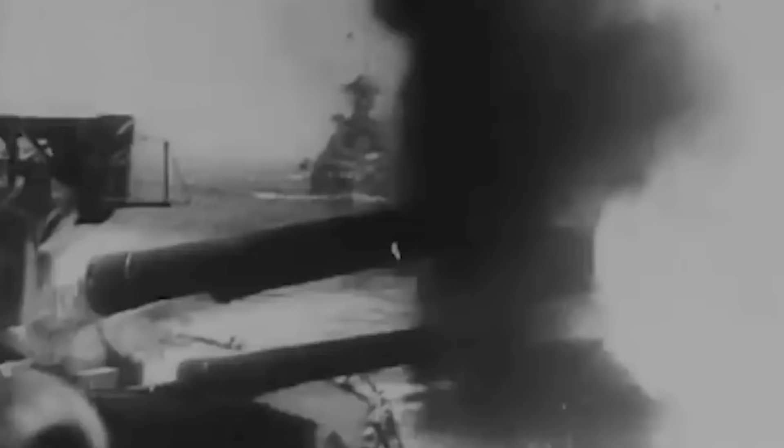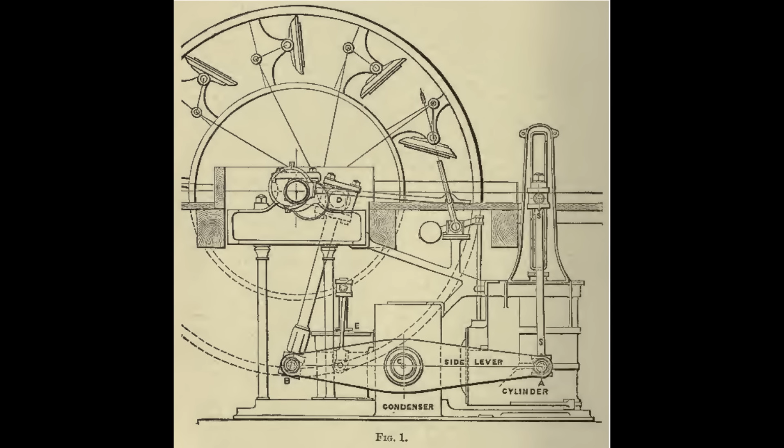The history of engines in warships only spans a couple of centuries, a far shorter time than ships have been in existence, but enough time for radical change in the field of naval propulsion. We've already covered boilers, the things that generate the steam, and later on we'll cover propellers, the main form of actually moving the ship around for most powered warships. But today, we're going to take a brief look at what sits between the boiler and the screw or paddle wheel in order to ensure that the ship can move. Now, notably, we are only going to be looking at the main developments of the marine engine, rather than looking at every single possible subvariant and dead-end design that ever was come up with.

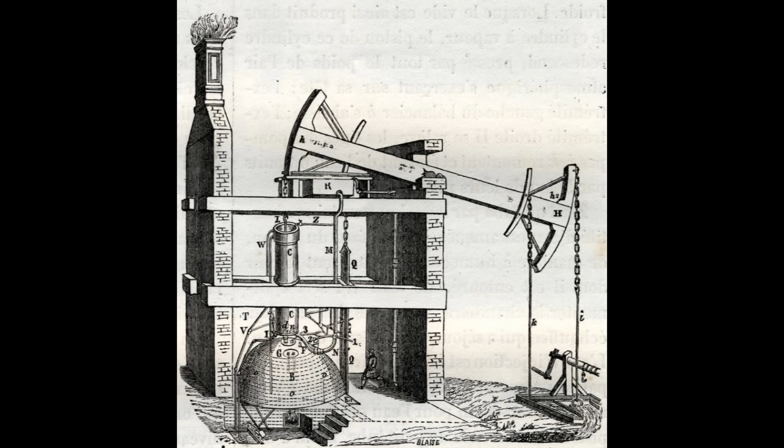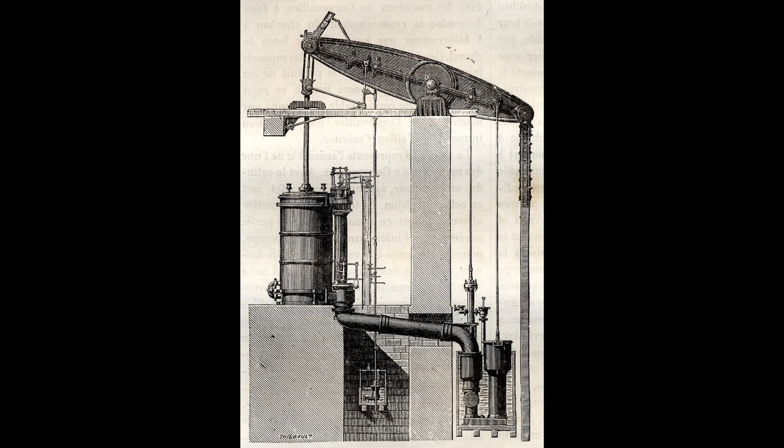Steam engines had been around for about a century, just over, by the 1820s. Although most of that time they'd only really existed as massive low-pressure fixed installations which could pump water out of mines and drive factories, but little else. But the dawn of the 19th century had seen several advances in raising the pressure that could be used in steam engines, and this in turn gave a much larger power output for a given size of engine, and this began to make the idea of an engine that was small and powerful enough to be used on a mobile platform instead of a fixed installation somewhat more viable. Due in part to the fact that ships are simply much, much larger, ships would be the first application of this technology, with various experimental steamships beginning to be devised in the late 1700s.

But the first use of steam power in a military application was probably the paddle-powered floating battery Demologos, later Fulton, which was developed for but not completed during the War of 1812 on behalf of the US Navy. However, her nature meant that she was effectively confined to harbour.

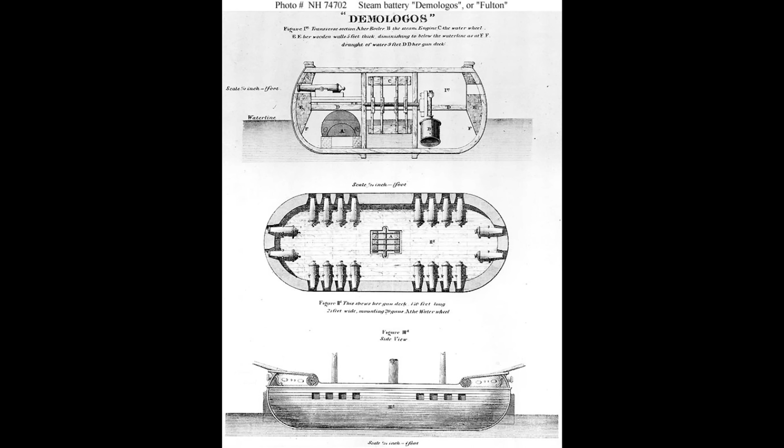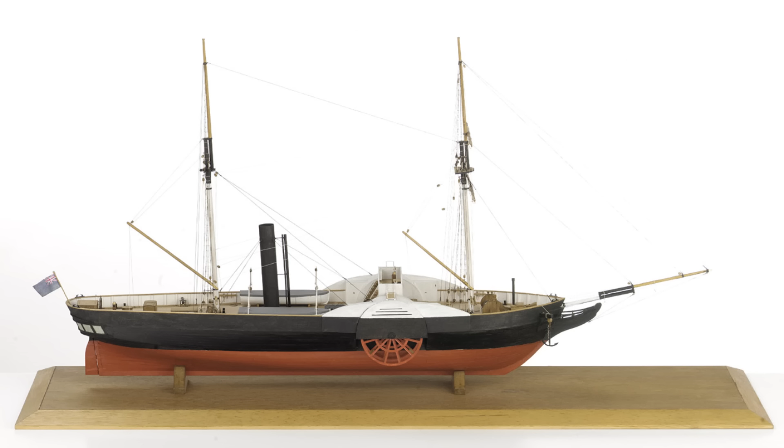The use of steam power fully at sea would have to wait until the deployment of ships like HMS Comet, a paddle-powered tug launched in 1822, along with other small ships like the Monkey, which displaced about 210 tons, and which used Boulton and Watt steam engines that had around about 80 nominal horsepower. Some of these engines had 2 cylinders, and could work at maybe 1 revolution every couple of seconds. The Monkey was followed in service by the Active, which also had 80 nominal horsepower, and then the Lightning in 1823, which had 100 nominal horsepower.

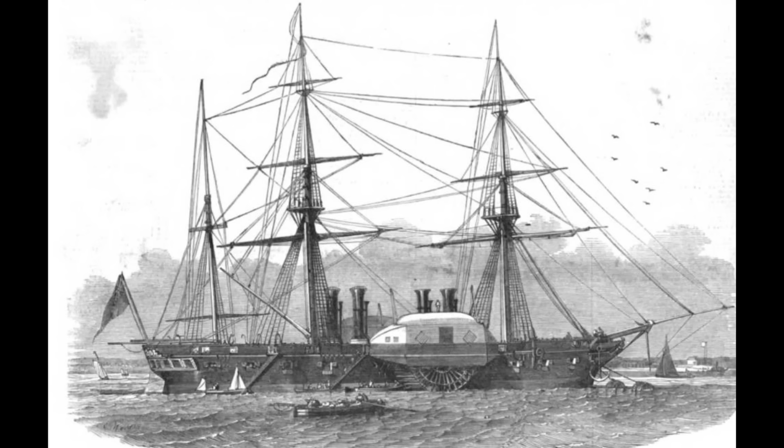These early steam vessels were mainly used for towing and general harbour and coastal purposes. They couldn't really be called warships. All of these vessels were propelled by paddle wheels. The limitations in terms of perceived vulnerability and the amount of space along the side that the paddles took up would mean that a full-on warship intended for the line of battle running on steam would have to wait for a little bit. But these early ships used some of the earliest form of steam engine equipped on a warship, the side lever engine.

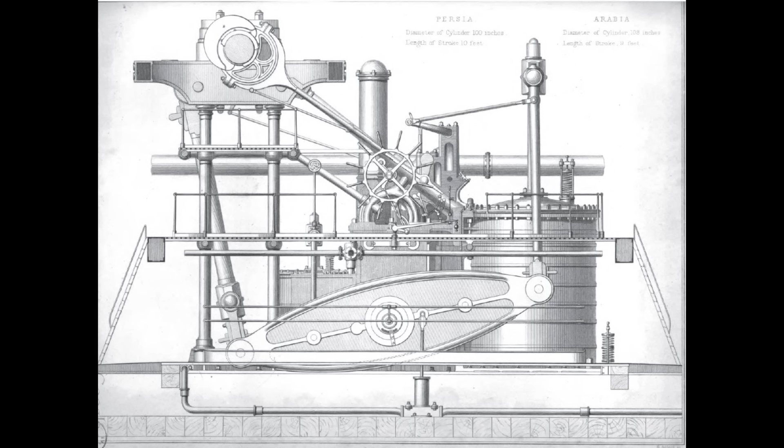This was a step up from the simple beam engine that was the ancestor of all other types. The side lever engine was a fairly tall mechanism. As with all steam engines, pressure built in the cylinder, which then forced the cylinder head to rise, and once the cylinder head got to the top of the cylinder, the steam pressure was released, and in the case of the side lever engine, the resulting weight and vacuum drew the cylinder head back down again, where it would repeat the cycle. In the side lever engine, the head was connected to a rod that lifted one end of a large iron lever, or sometimes 2 for balance purposes.

This would then cause the other end of the lever to rise or fall in opposition, and that, in turn, was connected via more metalwork to a crankshaft that generated the rotational motion. Compared to a beam engine, where the lever was mounted quite high up, on a side lever engine, the heavy levers were mounted much, much lower down, which gave the entire engine a quite low centre of gravity and made the entire thing a little bit shorter in the vertical element.

This was important on a warship for both stability and tactical considerations. Even if it was mounted quite low in a ship, a tall engine could end up with a substantial portion of itself above the waterline, and that in turn rendered it very vulnerable to being disabled by gunnery, usually accompanied by some kind of disastrous steam explosion to go along with it.

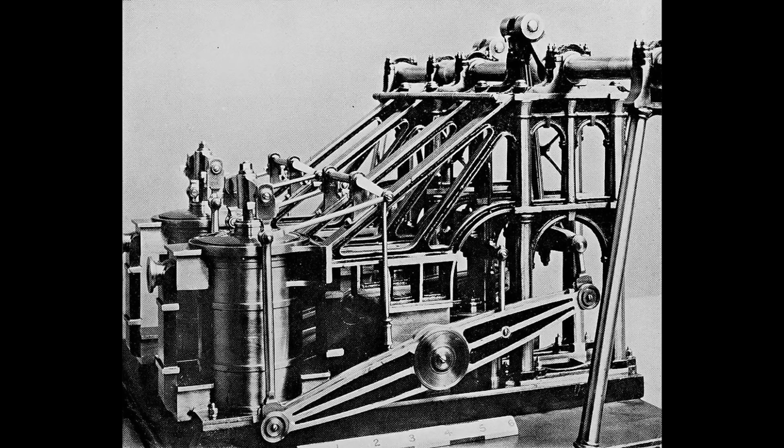The side lever engine was still somewhat tall due to the size of the cylinder needed to get a useful working pressure, and ships up to and including the American Civil War period would still sometimes end up losing power to hull shots crippling the upper parts of their engines. But the risk was somewhat smaller with a side lever engine than with some other earlier engine types.

The two main issues with the side lever engine were firstly that it could only realistically power paddle wheels. That wasn't so much of an issue in the 1820s, but it was something that would rule against its continued use as time went on. The other issue was that the normal twin levers and all the various connecting rods made it overall a very heavy engine for its power output.

Whilst it was running at a somewhat higher pressure than older engines, that simply meant that PSI values could be read as whole numbers above atmospheric pressure, and they actually did some useful work beyond creating a vacuum, which in older steam engines, especially mine pumps, had actually ended up being the thing that did most of the heavy lifting.

Between the early 1820s and 1840, 70 additional steam vessels would be added to the Royal Navy alone, let alone all the other navies that were quite rapidly adding steam warships and auxiliary vessels to their forces. The majority were fitted with the side lever engine, and this tended to work at a steam pressure of about 4 pounds per square inch above regular atmospheric pressure.

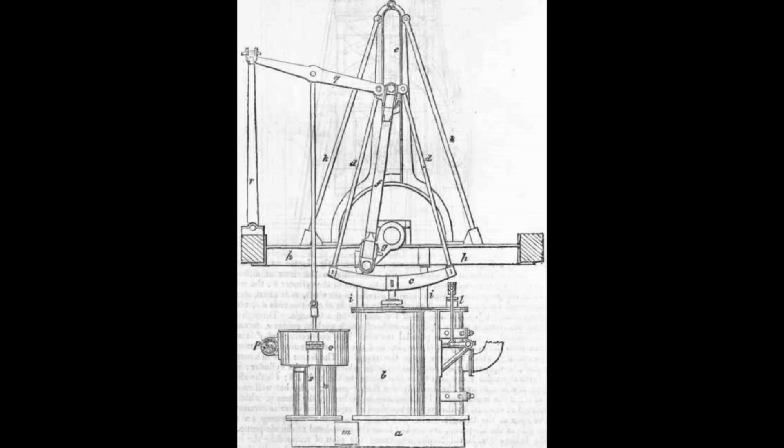After the introduction of the side lever engine, a number of variants on both older beam and the side lever engine itself were developed, often with quite significant regional uptake local to the developer who'd invented it, and occasionally they would see significant uptake across the world after a short period. But most of these variants were largely civilian developments and would not feature in warship construction except in extreme circumstances, such as the American Civil War, where merchant vessels were taken into military service and converted into warships, despite the fact that their engine design may not be necessarily optimal for a gun engagement.

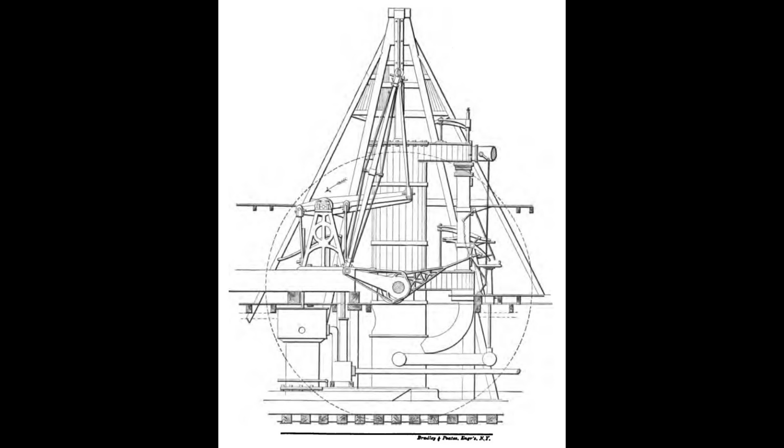The main reason for the lack of use in ships actually designed for combat was that, similar to the beam engine, most of these variants had significant weight and carried a lot of that weight at height. On a merchant ship, that was less of an issue thanks to the large amounts of cargo they carried, which had quite the ballasting effect that would mitigate stability issues, whereas on warships they were already carrying substantial weight much higher up due to having to carry guns and the associated gun crews. When such converted ships ended up in combat, these tall engines could often prove to be something of a weakness. But the increasing prevalence of the screw propeller demanded a new kind of engine.

The conversion of older ships to block ships, these usually being Napoleonic-era ships of the line, typically a third rate, that had been converted to carry a steam engine and then used either as a guard ship for a harbour or as some kind of wind-independent coastal defence force, as well as much more ambitious plans to convert larger vessels to carry auxiliary steam power plants, plus the construction of newly built smaller vessels, saw a wide range of systems tried.

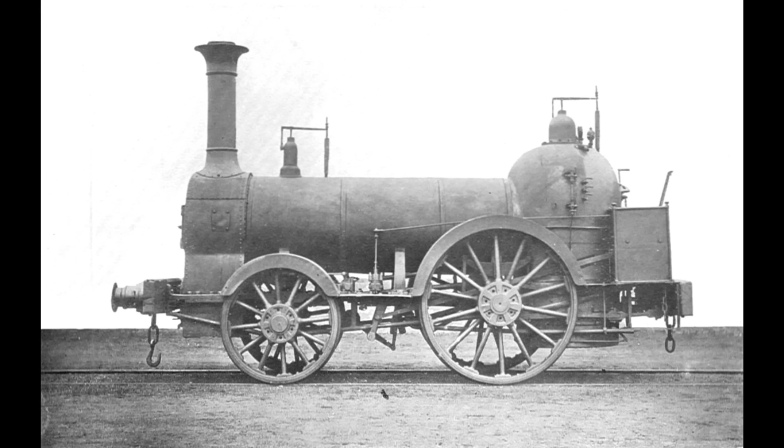Even though the steam locomotive had actually been a slightly later development than the steam-powered warship, in some cases what amounted to steam locomotives that had had their wheels taken off were used for lower power application and auxiliary plants. This wasn't ideal for a number of reasons, but these power plants could at least drive a screw propeller and were somewhat readily available.

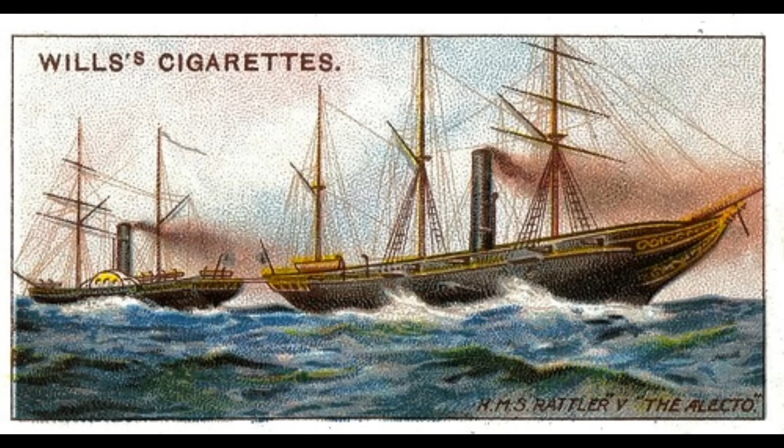Two particular ships stand out in this period of development, which ran from roughly 1830 to 1850: HMS Rattler, the British screw sloop that famously engaged in a tug-of-war with the paddle-powered HMS Alecto, and the French line of battle ship Napoleon, which was the first purpose-built steam-powered capital ship to enter service. The former vessel, Rattler, used an odd engine type that didn't really catch on in warship circles.

The Siamese or twin-cylinder engine worked on the same kind of pivot and lever system principle as earlier side lever engines, but instead of a single larger cylinder, it used two shorter cylinders to provide the relevant motive force. This allowed the engine to be somewhat shorter in the vertical element, and the two cylinders meant that only a single arm was mounted in between the two cylinders, instead of the two arms more commonly found on either side of a single cylinder in a side lever engine.

It was compact and slightly lighter than the older engine, but it nonetheless reflected the growing divergence between civilian and military engines, as its primary attraction was the fact it didn't interfere with the lower parts of the gun deck, as opposed to any particular fuel efficiency.

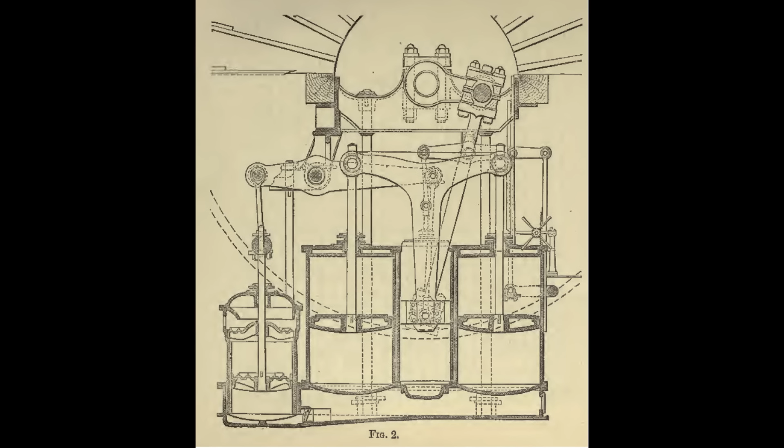But the multiple stages of leverage between engine cylinder and crankshaft in any of these types were somewhat inefficient in terms of transmitting power to the screws, and all of that metal was quite heavy. A change was needed, and so engine technology began to advance to direct drive type engines.

In the paddle-wheeled ships, which were still in use as tugs, sloops, and other vessels not considered likely to see much combat and definitely not going to stand in the line of battle, one of the first direct drive engines was the so-called Oscillating Engine, which was used almost exclusively to drive paddle-powered warships.

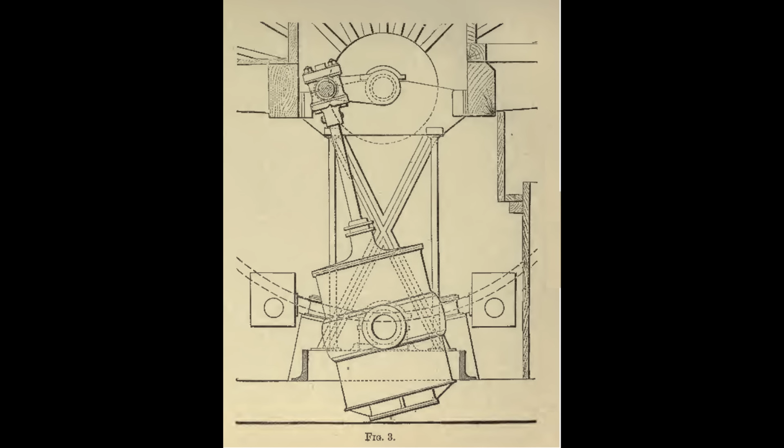Simply put, the direct drive system allowed the cylinders to impart power directly to the crankshaft, making the entire system significantly lighter and more efficient than older types, since the beams and most of the rods could be done away with, and there were fewer stages of energy transfer in the system.

However, they required the cylinders themselves to be able to move to account for the crankshaft rotation, something which had previously been the concern of the intermediate beams.

It also concentrated quite a few separate movement aspects into a number of fewer components, which made the savings described earlier, but also meant those individual fixed components were far more complex and thus far more difficult to maintain.

The requirement for the moving cylinders was a particular sticking point with this kind of engine, as it also meant that the feed for the steam line had to be fairly flexible, and, well, if anything went wrong, you had a cylinder full of hot steam that was moving back and forth, which was not that easy to get anywhere near.

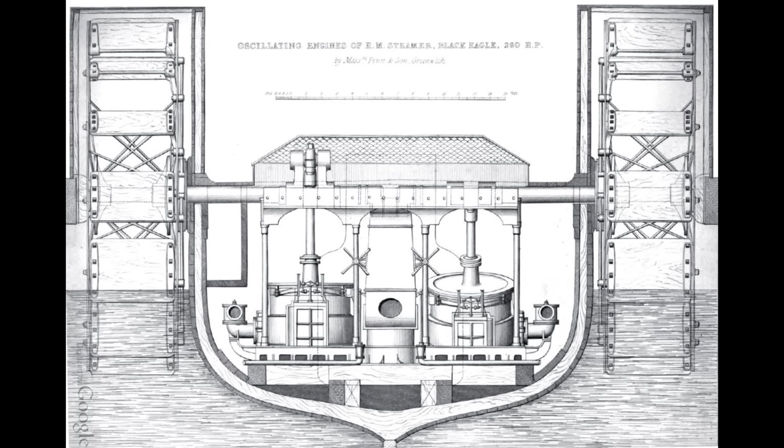The other issue was paddle wheels just needed to rotate somewhat slower than screws, and engines had therefore been designed for this level of rotation.

This was where Napoleon comes in. Although she wasn't the first ship to introduce the direct drive engine, her use of one to drive a screw on a large warship posed the problem of using an engine with a relatively low set of revolutions per minute with a propeller that needed to go somewhat faster than that in order to get the ship moving at any appreciable speed. This would be solved by introducing, at least temporarily, another innovation: gearing.

In this case, stepping up the revolutions per minute, albeit that this required an exceptionally powerful engine for the time, since each revolution of the engine had to drive several revolutions of the screw, which divided the overall power, hence the need for a high starting energy so that enough was left per revolution to turn the propeller against the resistance of the water in most sea conditions.

Needless to say, this also required a lot of maintenance and contributed somewhat to a reputation of the ship for its steam plant's unreliability. Steam was at this point also still very much an auxiliary.

The massively inefficient use of the power of the boilers, and their, by later standards at least, very low pressures, meant that a ship would burn through any reasonable coal stock long before it got even half as far as a sail-powered vessel could, since sail vessels relied mainly on how much food and water they carried, and hence all but the most coastal of craft would still carry a full set of sails, and would continue to do so for quite some time.

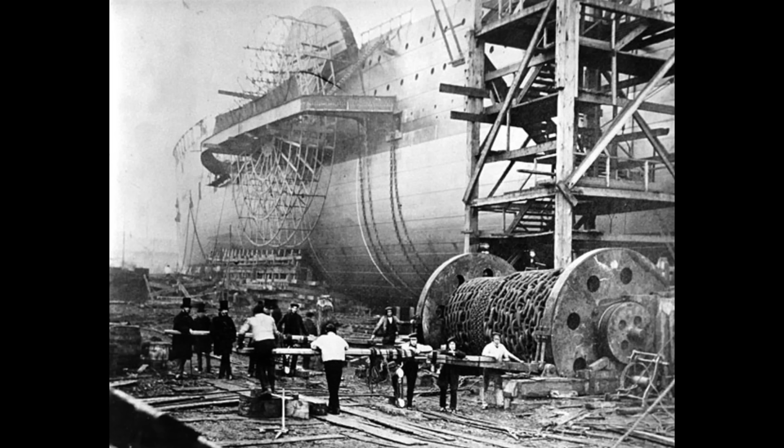In order to travel any substantial distance by steam, ships would need to be much, much larger, exploiting the square cube law to disproportionately increase their coal storage capacity, which would lead, in the civilian world at least, to the building of the SS Great Eastern.

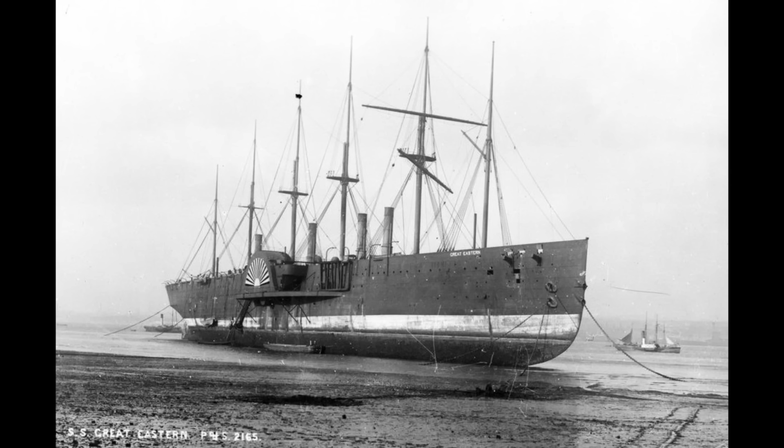But since she cost more than twice the amount of any two of the largest steam-powered ships of the line you can find put together, and that despite there being basically no cost involved in arming the Great Eastern, since it didn't really carry all that much of an armament, that kind of size of ship was not a viable path for warship design, no matter how generous a budget you had.

Instead, the trunk engine would be developed. One of the ways to improve reliability was to have a longer power stroke, as this distributed the force exerted on moving components over a larger distance, and thus kept the strain on the individual components down.

But this was counter to the need of warships to keep the engine levels below the waterline. And so the solution, it seems simple on paper but was relatively difficult to pull off in practice, was to lay the whole thing on its side. And now you could, within the confines of the ship's dimensions, have as long a power stroke as you liked.

Stop giggling there in the back.

Without any issues from incoming fire overhead, as the cylinder width was now, technically speaking, the cylinder height, the cylinder itself could be made somewhat larger. This allowed the connecting rod on the cylinder head to oscillate within the cylinder run itself, and that meant the cylinder could go back to being fixed, rather than moving back and forth on the oscillating direct drive engine, which further improved reliability.

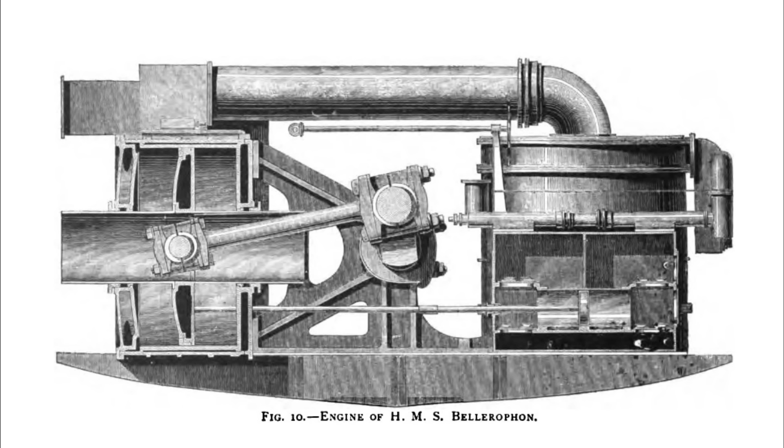At first, the trunk engine was a fairly substantial bit of kit, in part due to the drive for reliability and low maintenance requirements, which are key features of military engines where at all possible. However, the pressures of war often lead to innovation, and working from a fairly solid base of engine technology in the 1850s, not only would the trunk engine enter widespread service, but as a result of the Crimean War in particular, it also proved possible to make it considerably smaller, increase the working pressure, and up the speed of rotation.

This was largely thanks to a Royal Navy order for dozens of steam-powered gunboats, whose small size needed a smaller engine, and for which this new engine was mass-produced, which also ended up lowering the per-unit cost, and led to a raft of spare parts once the gunboats themselves were put into sheds and mostly forgotten about as the Crimean War came to a close.

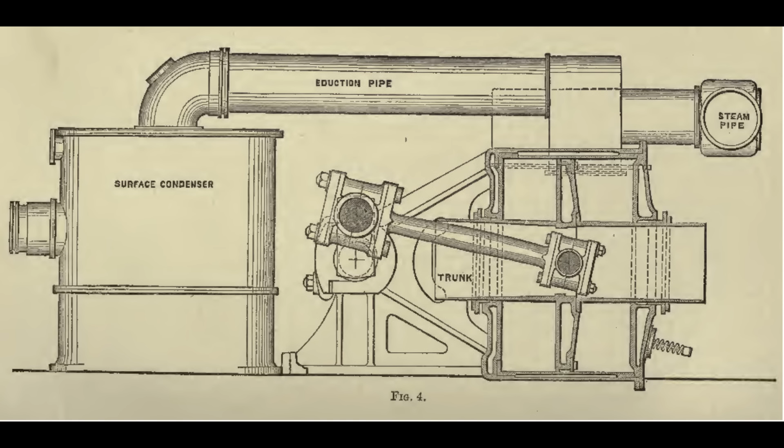And that in turn meant that the trunk engine, in both its large and smaller configurations, became very common in both the military and civilian worlds for several decades, until the advance of newer technologies rendered them unable to compete.

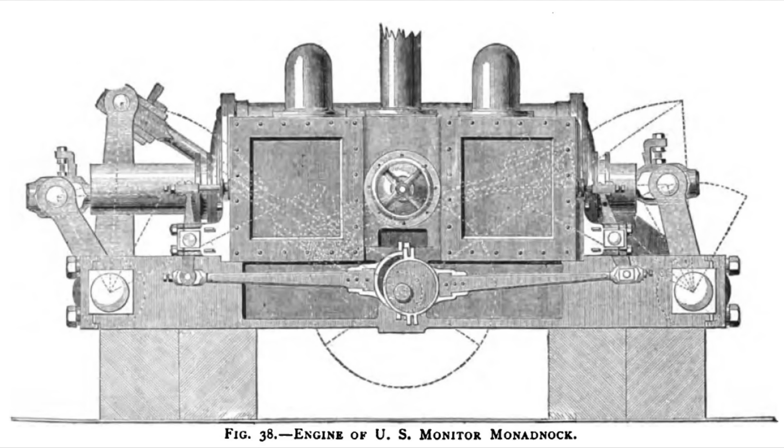An even smaller variant that used two cylinders to generate the combined power output of a single larger one was developed for use on US monitors during the American Civil War. This was done purely to reduce the overall height to the absolute minimum possible, as the engines needed to fit in the extremely low draft and low freeboard hulls of American Civil War era monitors. However, the additional complexity of the type for the same power output meant that they didn't really see that much use outside of this rather specific niche.

Following the success of the trunk engine, a number of other horizontally mounted engines were developed by companies familiar with the older style of engine building. But these tended to be effectively an older engine design, usually one of the tall ones, except now only sideways. This had certain advantages in terms of parts commonality and reliability, but came at the expense of efficiency.

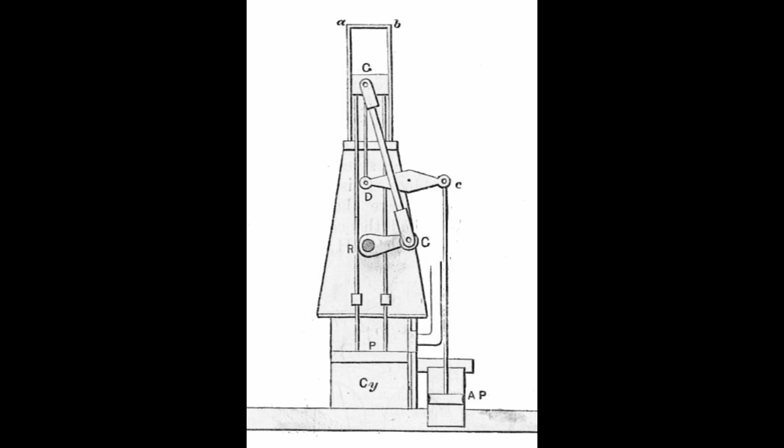They also tended to have considerable additional weight and a lower power output due to reintroducing more of the intervening rods and levers, as seen in the older naval engines, and this meant that these engines would usually only be installed on warships where steam power was seen as a necessary but highly auxiliary form of propulsion, and thus the cost of the machinery was far more important than specific efficiency or range. So many composite gunboats, composite sloops, corvettes, and the like would be fitted with these kinds of cheaper but less efficient power plants.

During this period of development in full-on line warships, however, another major advance was made in engine technology. As mentioned at the start, early steam engines used steam to power one stroke of the engine, and the vacuum that was left in its absence, along with usually a mixture of gravity and momentum, kept it going through the other stroke. But this was also another area of inefficiency.

Commensurate with the growth of the steam warship came the invention of the double-acting steam engine, in which steam was fed into both ends of the cylinder, alternately, depending on where the piston head was, ensuring power on both the upstroke and the downstroke, and thus boosting the output of the engine overall. As time went on, ships also got considerably larger, and that meant there were larger engineering spaces, and thus more underwater volume.

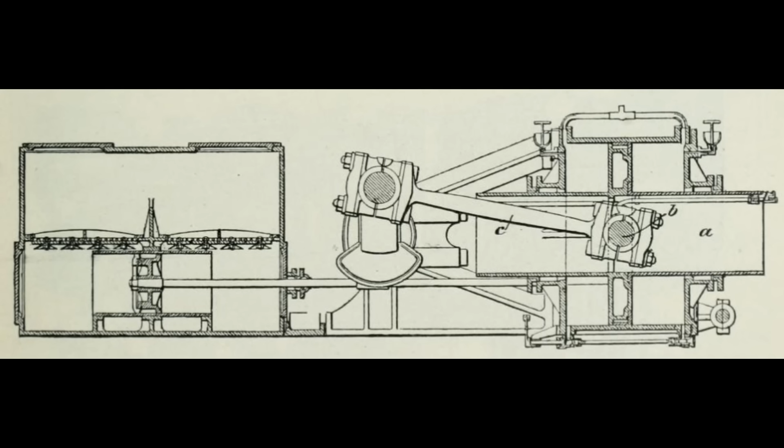And that in turn allowed engines to rotate back to being mostly, or in some cases entirely, vertical, without compromising the ship's durability in combat, since they'd still be below the waterline. Also, during the period from the introduction of the trunk engine to the re-emergence of the vertical type, steam pressures had been climbing steadily from around 30 psi above atmosphere to about 60 psi, which meant that for most ships the power available to their engines had approximately doubled.

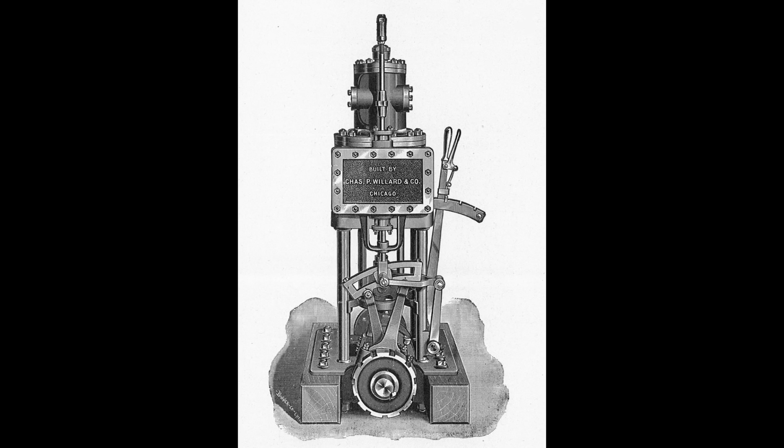As the general principles behind cylinder-equipped steam engines had now been pretty settled, the latter part of the 19th century would see the efficiency of the use of the power provided by the boilers increase.

This followed two lines of connected development enabled by boilers themselves getting progressively more capable. Steam pressure would roughly double again to around 120 psi by the 1880s, and by the turn of the century some cruisers would be running on double or more of that again, between 240 and 300 psi.

Firstly, the addition of multiple cylinders on full power engines, as opposed to multiple cylinders used purely for reasons of space or stability, such as in the US monitors or on oscillating engines, came into effect. The second was the use of multiple expansion stages, made possible by the aforementioned increase in energy present in the steam.

Although experiments with various ideas had been ongoing almost as long as warships had carried steam engines, the idea was essentially that when the steam left the cylinder at the end of the power stroke, it would normally go back through a condenser and thus back to the boilers. But it still had a certain amount of energy that could be utilised if the energy remaining was high enough to do some kind of useful work.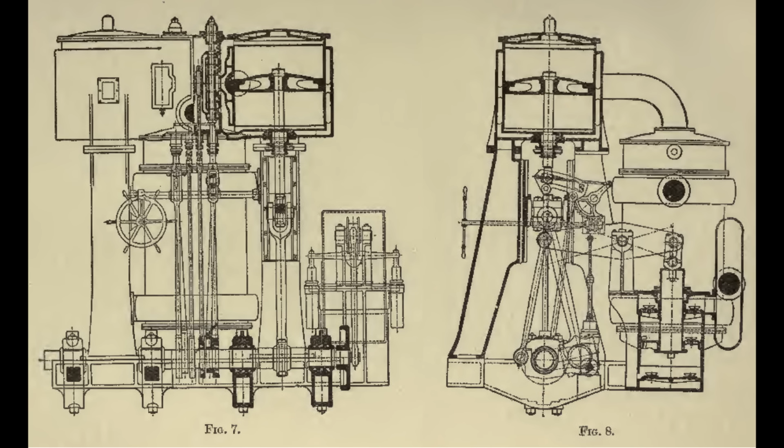And thus, if instead of going straight to the condenser, this steam was fed into another lower pressure cylinder, which could then provide some additional force to the prop shaft, the steam, now with a lot more energy removed from it, would then be able to return to the condenser. Typically, the first higher pressure cylinder would be smaller than the subsequent lower pressure cylinder, which accounted for the final expansion of the steam, and this allowed a couple of different options.

By using steam at the same starting energy state as before, fresh from the boiler, because you could extract more of that energy, you could boost efficiency. In fact, you could even lower the energy in the original steam feed, and thus burn less fuel to a degree, since you'd end up with about as much energy going to the screw as with a single expansion engine, because you're extracting more of that smaller amount of energy.

Alternatively, you could increase the amount of energy in the steam coming out of your boiler, since the significant excess that you'd get out of the first stage now wouldn't be wasted, and thus you could go faster because you were getting significantly more energy into your propeller shaft.

Keeping the energy level of input steam about the same as before, which was effectively the first option we mentioned, was seen as something of a balance between the two, with either extreme possible, i.e. much higher speed, or much better fuel efficiency, depending on what outcome you preferred for the ship that the engine was being built for.

For example, a torpedo boat, for which speed was paramount and range was almost a non-issue, would want the absolute maximum power you could get out of it, whereas perhaps a corvette or some kind of second or third class cruiser that had to go very long distances and didn't have to worry too much about maximum speed would be looking for a very efficient form of steam power plant.

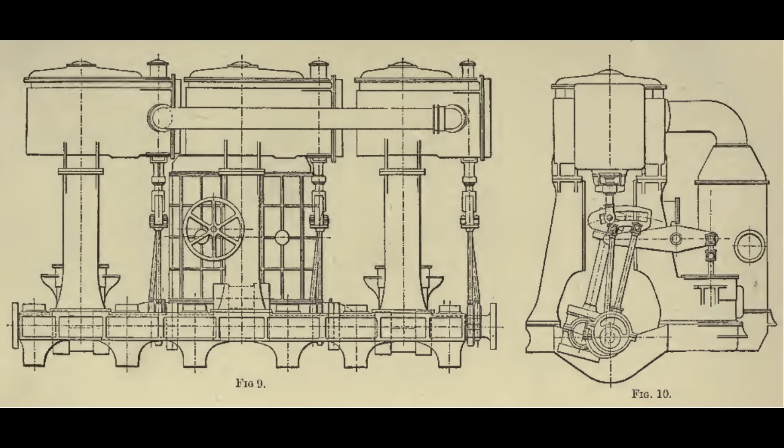And that's why in this era of engine technology, you usually see ships described with their engines being stated as X expansion, Y cylinder, or X cylinder, Y expansion, to give some idea of the overall configuration. Titanic, for example, had 4-cylinder triple expansion engines.

And the reason you could describe the expansion as being X or Y is because it didn't just stop at 2-stage expansion. With greater power output from better boilers still increasing, it became possible to add a 3rd stage to proceedings, and thus the vertical triple expansion engine, which was the most common kind of engine in the pre-dreadnought era, was born. Whilst civilian models would later go on to develop the quadruple expansion engine, the vertical triple expansion engine represented the end of the line for this kind of engine for warships generally.

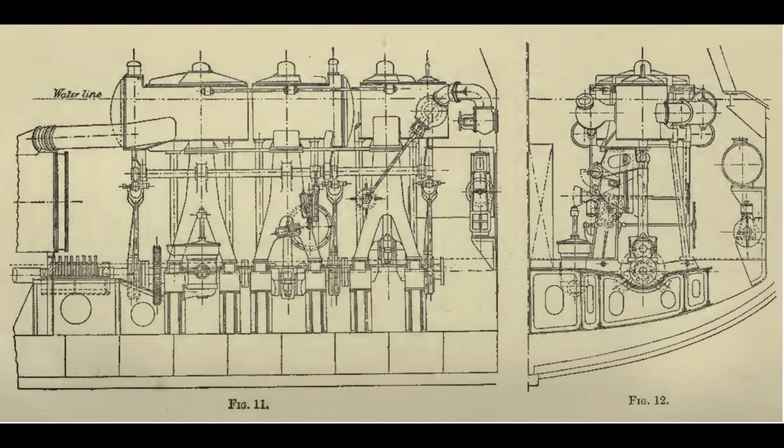However, whilst they would usually be replaced in ship design over the 1900s and early 1910s in most nations, the vertical triple expansion engine's story wasn't entirely done.

During World War II, the sheer number of smaller ships being built, the lack of need for most of them to be especially fast, and the fact that cutting the blades for turbines was something of a bottleneck, would lead to the return of the vertical triple expansion engine in numerous ships such as anti-submarine warfare corvettes and even some escort carriers, as it was relatively simple, cheap, and easy to build, and thus had retained quite a widespread circulation in the civilian merchant world and their suppliers, where speeds above the mid-teens of knots were rarely required.

And by that point minor improvements to the engine technology had allowed ships to hit just over 20 knots quite comfortably. There was also a secondary issue of lots of merchant sailors being taken into naval service and being familiar with the vertical triple expansion engine, which therefore needed far less retraining if you assigned them to these kinds of vessels.

For most warships, though, speed was the thing that was desired, and that was something which the vertical triple expansion engine was both starting to struggle to deliver, as this climbed into the upper 20s of knots for some of the bigger cruisers, and advances in fire control also required a much smoother ride.

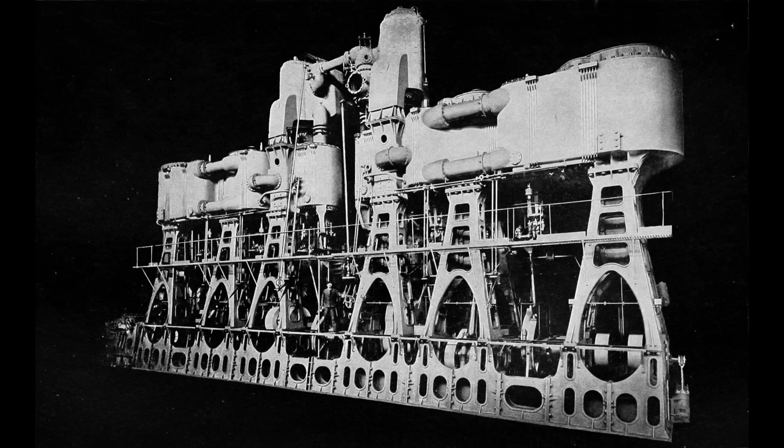The fundamental problem with vertical triple expansion engines, and indeed any engine of the types that had been so far used, was that a fairly large amount of metal was being hurled back and forth repeatedly, and at considerable speed. This in turn led to vibration, which could be mitigated somewhat by increased lubrication efforts as well as cushioning installations, but it couldn't be eliminated entirely, and the solutions that mitigated it somewhat led to considerable increased weight and some rather interesting effects in the engine room, as lubricant would tend to fountain all over the ship's engineers when the engines were being run at speed, such as, say, in a battle.

Until the invention of forced lubrication, which was still some years away in the early 1900s, vertical triple expansion engines could also only be run at full power for a limited amount of time before risking catastrophic failure due to repeated and rapid stress. But of all of these factors, as the 1900s moved towards the 1910s, the vibration one was the most important.

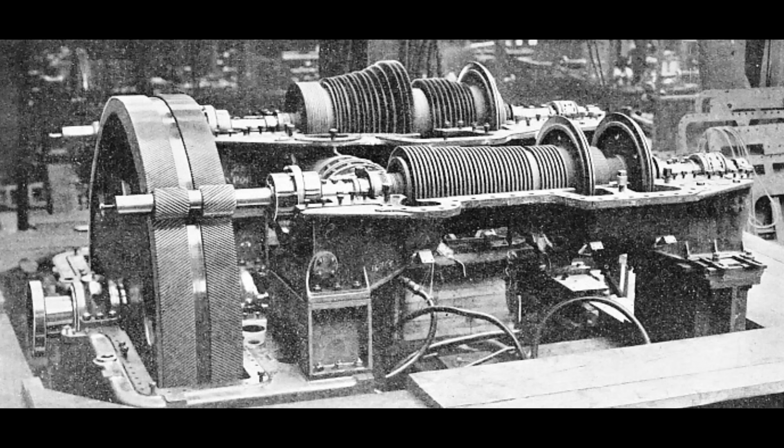As this would make the use of long-distance rangefinders quite difficult, if not impossible, and that in turn would cripple a ship's ability to fight in a long-range gun battle, which was now possible thanks to the development of central director firing coupled with the new rangefinders, unless of course you went through the expense of dampening all vibration out. And thus the steam turbine, first seen in the 1890s aboard ships, began to take the place of the vertical triple expansion engine in newly built warships as the first decade of the 20th century progressed.

The steam turbine worked in a very different way. Steam was still needed, but instead of driving a linear motion in a cylinder that then had to be mechanically transformed into a rotational motion, the turbine used high-pressure steam passing through a series of rotors to create rotational motion directly. Whilst the precise mechanism as to how it did this could vary, with reaction turbines, impulse turbines, and the like all being developed, the core idea was essentially the same.

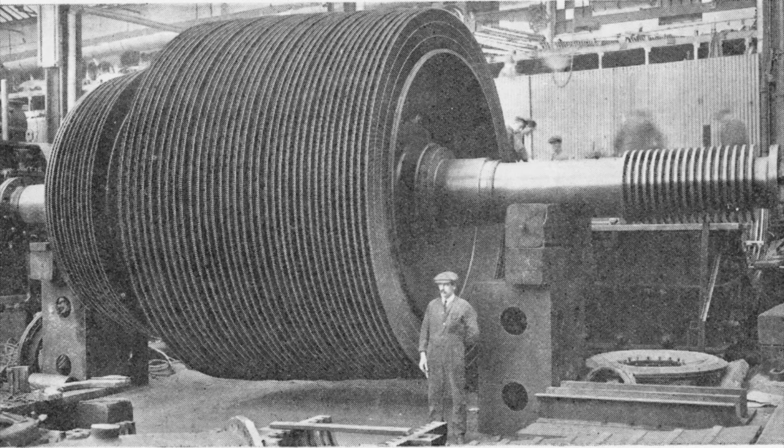They could run with minimal vibration, and due to the moving parts being in simple continuous circular motion, they could in theory run at full power for as long as you had fuel to keep the boilers lit. Like vertical triple expansion cylinders, you could chain turbines together to use steam at progressively lower and lower pressures. And as even a single turbine contained multiple rotors, you could even vary the power output of the turbine itself by either releasing steam from the turbine before it completed its full run through all the rotors, or by looping steam back into the turbine to increase the overall effect on the rotors themselves.

However, turbines were most efficient in terms of using the energy that was in the steam that was provided to them when they were run at near enough full power. This was great if you wanted to go really fast. It was not so great if you wanted to cruise at a somewhat more pedestrian speed, which was itself more efficient in terms of the amount of fuel burned in your boilers per hour.

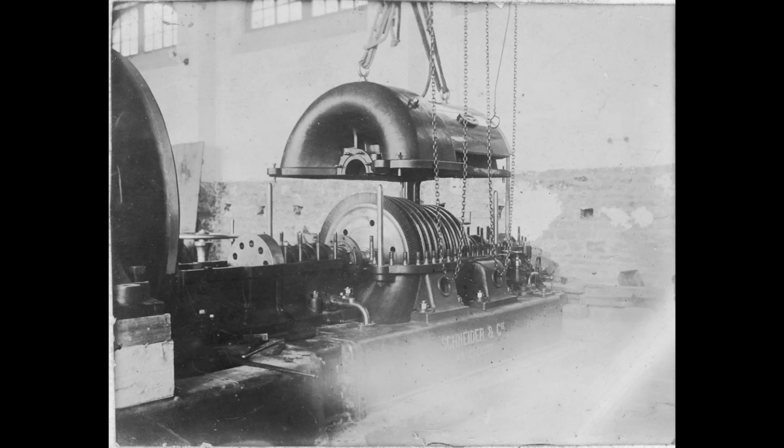Turbine efficiency dropped off considerably when you ran it at these lower speeds, and unfortunately the high-speed efficiency bracket for most early turbines was several thousand revolutions per minute, which when connected to the propellers meant a lot of cavitation, and thus both damage to the propellers themselves and a loss of propulsive efficiency, as they simply spent most of the time spinning in a cloud of bubbles and turbulence of their own making if you weren't very careful.

A number of different solutions were tried. On some ships, especially destroyers, they simply added more propellers to the shafts, reasoning that if you could only get 50% power output from a propeller, well, if you put 3 propellers on the same shaft, you then got 150% output, minus a little bit for the weight of the extra propellers.

In other ships, a cruising turbine operating at lower pressure was added for low-speed operations, and the higher pressure, faster spinning turbines would only be spooled up for top-speed operations. In some instances, a cruising turbine might be a completely separate installation, whilst in others it could be an integrated part of an overall single turbine solution.

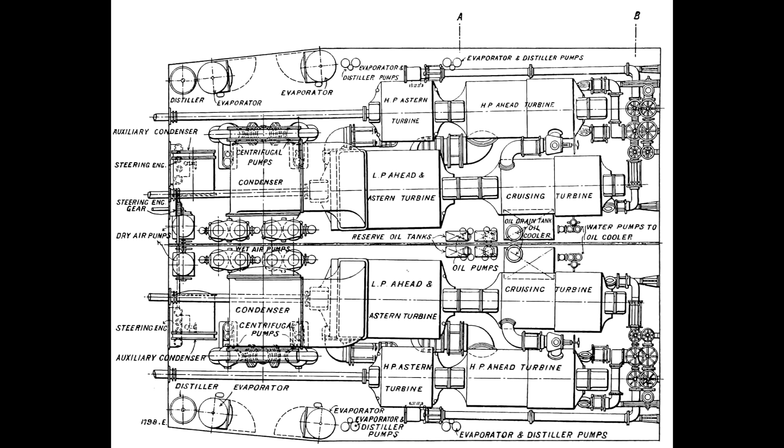These were only stopgap solutions, though. The true solution came about in the 1910s with the development of geared turbines. These worked in the inverse manner to the gear set fitted 60 years previously on the Napoleon. That set had uprated the engine's rotational speed to get the screw turning at a reasonable rate, whereas the new gears downrated the high speed of the turbines to a much lower speed for the screws, which would in turn return prop speeds to their most efficient regimen, and also meant there was significantly more power behind each rotation, which in turn would allow for bigger and heavier propellers in the future, albeit it also meant multiple shafts would become more and more common, as it was now possible to exceed the reasonable physical tolerances of the propeller shaft itself by accidentally putting too much power into it.

But whilst steam turbines with reduction gearing would go on to power the bulk of warships through to the end of World War II, there were two other systems that would compete with it: diesel and the turboelectric drive. The turboelectric drive was the closest to the existing steam engine line of development, as it actually used turbines as part of the powertrain, but instead of direct drive or reduction gearing to the propeller shafts, it used a turbine, or turbines, running constantly at their optimally efficient speed to run electrical generators instead. These generators would then provide power to electrical motors as well as to the rest of the ship, and the electrical motors would in turn rotate the propeller shafts.

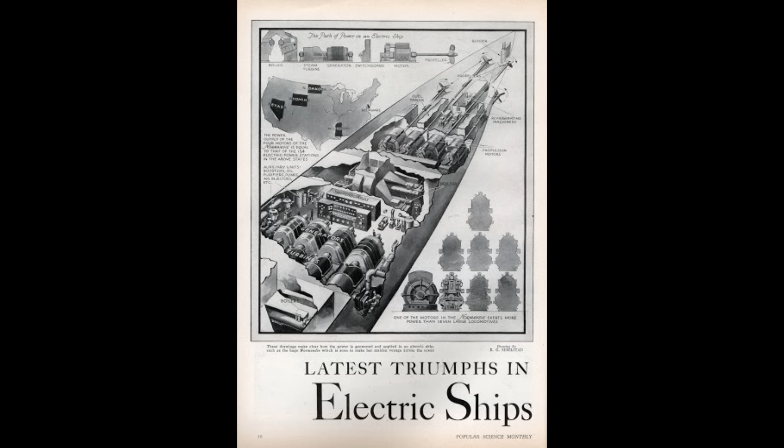These additional steps drag the efficiency of energy transmission all the way back down, and so once good reduction gearing had become affordable, the turboelectric system was, for various reasons outlined above, generally dropped in warship construction in favour of the geared turbine. Diesels were another matter.

These were entirely divorced from steam production. They instead were a much more recent innovation, the internal combustion engine, which did the job of boiler, turbine, and in some cases even gearing, all in one neat package.

Their relatively compact size and the fact that you could simply shut them down and start them up again in fairly short order, plus the fact that diesel was much harder to set on fire or make explode compared to petrol, meant that they would rapidly become the favoured power plant for submarines when operating on the surface.

But when it came to competing with turbines on big surface warships, they were somewhat more difficult to maintain, and, at least when running on diesel fuel itself, about as expensive to run.

Later on, it was found that a diesel engine could in fact run on similar fuel to that used in steam boilers, which reduced the overall cost of operation.

Their main advantages were again the near-instant startup as opposed to the hours it could take to build steam pressure from a cold boiler, and the fact that they simply burned less fuel, so that you could go a lot further with a diesel power plant than a steam one, assuming you had the same size of fuel tank.

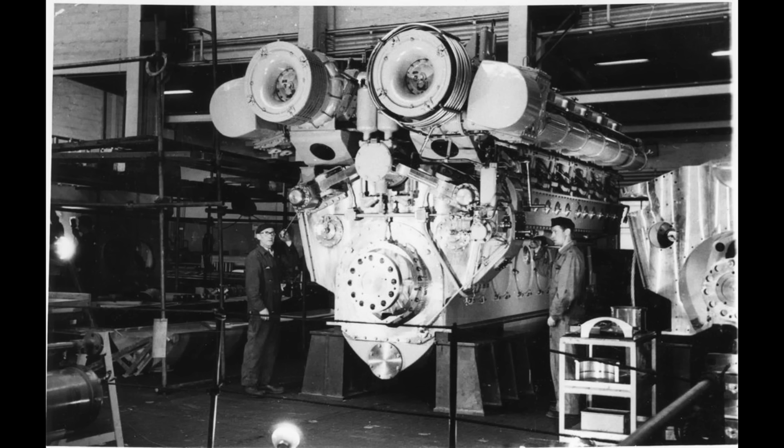And so, in surface warships, the diesel plant was not very often seen prior to the end of World War II, except in cases where sheer range was considered important enough that the speed drop was not seen as too massive a problem. Occasionally, this would take the form of a cruising diesel.

But the calculations that went into the design of the Deutschland-class Panzerschiff, for example, took the decision that an all-diesel power plant was preferable, simply for that range advantage, reasoning that at 28 knots there wouldn't be any capital ship, at least among the enemies that the Reichsmarine was thinking of fighting at the time, that could actually catch them.

It turned out to be possibly not the wisest of decisions in hindsight, but you can excuse them given the time when the Deutschland class was being designed.

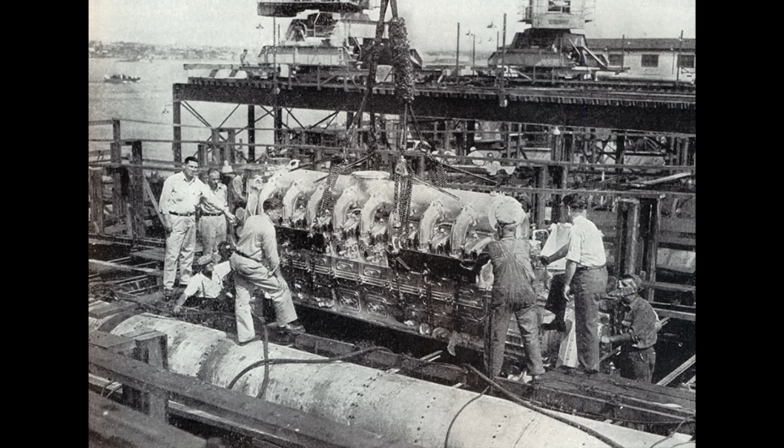And so that completes our brief look at the various kinds of marine engine that were involved in the propulsion of warships from the inception of the powered, propelled warship up to the end of the period that the channel covers just after World War II.

There would of course continue to be more advances: nuclear power, gas turbines, diesel electric propulsion on ships, diesel turbine propulsion on ships, and all sorts of other wonderful fun things. But that's for a channel that covers the latter part of the 20th century and beyond.

Of course, you will probably be asking, now we've covered boilers and then the engines, well, the next logical thing to cover is the propellers that take the output of these two mechanisms and actually push the ship through the water. And you'd be perfectly correct. So, at some point in the next couple of months, we shall cover the development of the ship's propeller.